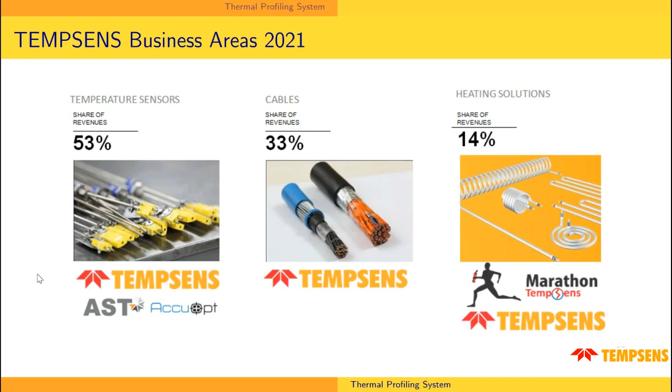In 2021, Tempsens' business areas are temperature sensors, which share 53% of revenue, cables, which share 33% of revenue, and heating solutions, which have 14% share of revenue. We are spread globally, with over 600 employees, present in 3 locations globally. We have applied 9 patents until now, and we also have 40 years of experience in this domain.

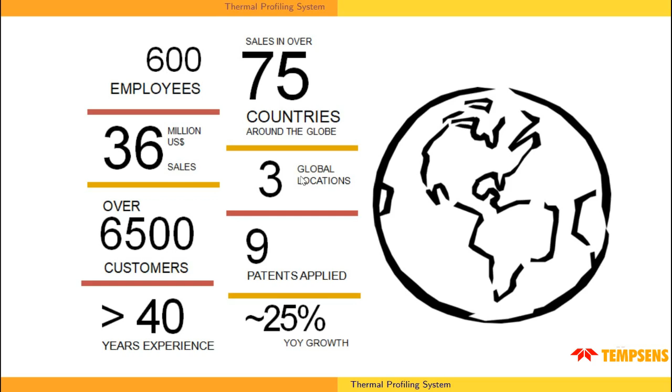Tempsens Instruments have majorly 3 domains: temperature sensors, heating elements, and cables. In temperature sensors, we provide a wide range from thermocouples to accurate RTDs, gauges, pyrometers, thermal imagers, calibration bath, furnace camera, fiber optic sensors and wireless sensors. So whether you want to measure temperature as contact type or non-contact type, we provide the solution in the form of thermocouples or non-contact sensors.

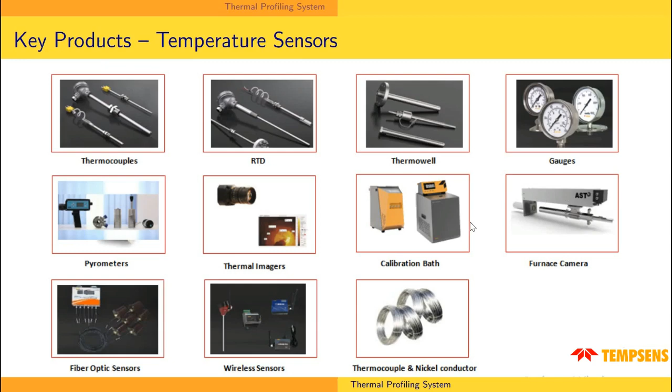Our key products in cables are thermocouple and RTD cables, high temperature cables, special cables, instrumentation signal cables, and LV control and power cable up to 1.1 kV.

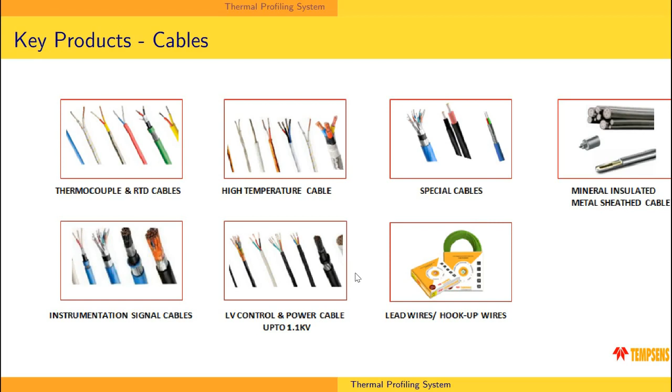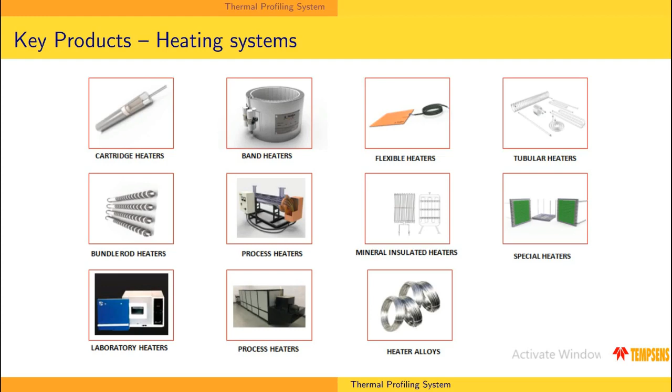We also provide heating systems and heating solutions to the industry. Cartridge heaters, band heaters, flexible heaters, bundle rod heaters, and process heaters are the major heaters we provide in our heating systems. We also provide temperature calibration services.

We are in Udaipur, Baroda, Bangalore, and Jakarta. Our comparison calibration covers -196 to 1600 degrees Celsius for contact sensors, and -30 to 3000 degrees Celsius for non-contact sensors, with small measurement uncertainty. We also provide furnace calibration services to industries, like temperature uniformity survey and SAT.

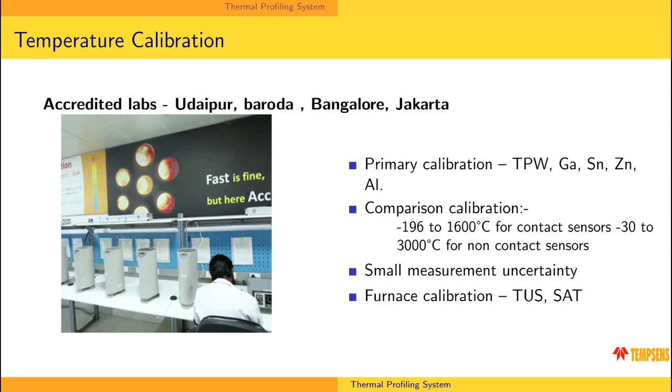Now let us talk about our main topic of discussion, the thermal profiling system. So before going into the thermal profiling system, what is its need? In each and every industry, temperature plays an important role. If we don't monitor our temperature accurately, then we cannot get a good quality product and cannot increase our productivity and optimization of the product.

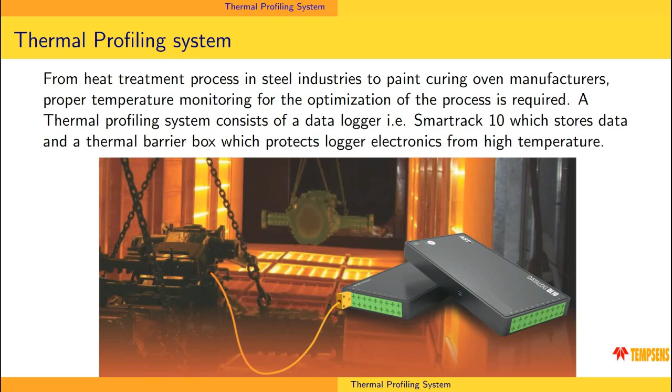From heat treatment processes in steel industries to paint curing oven manufacturers, proper temperature monitoring plays an important role in the production. A thermal profiling system consists of a data logger, Smartrack 10, and a thermal barrier box, which protects the data logger electronics from high temperature.

So now let us talk about the first part of the thermal profiling system, the Smartrack 10 data logger. It is used for monitoring and analyzing the temperature profiles of products within your heat treatment process. Accurate data acquisition and powerful analysis technique are combined with flexibility and ease of use. It comes with 10 channels of thermocouples of various types like J, K, E or T.

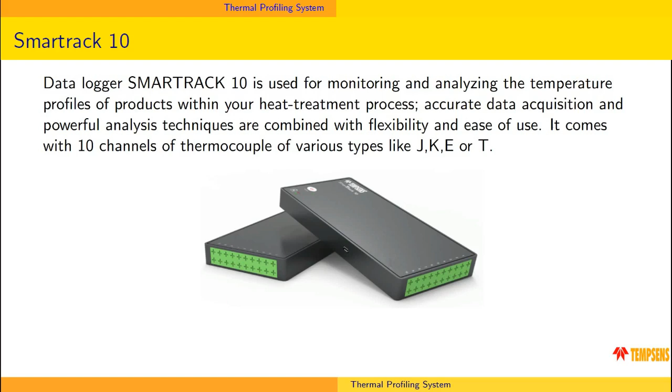Now let us talk about the specifications of our Smartrack 10 data logger. Total number of channels is 10. 50,000 readings per channel can be stored. Scanning rate per channel varies from 100 milliseconds to 1 hour.

Provision of replaceable and non-replaceable batteries are there. Replaceable battery can go up to 70 degrees Celsius, and non-replaceable battery can go up to 100 degrees Celsius. We have universal thermocouple input. LED indication for low battery, data logging and memory status is also there for hassle-free data logging. Wired telemetry via USB is available for data analysis.

Every data logger has some data logging services, but with this Smartrack data logger, you don't just log your data, you convert it into meaningful information. We also provide an RF wireless telemetry option, which is in development state.

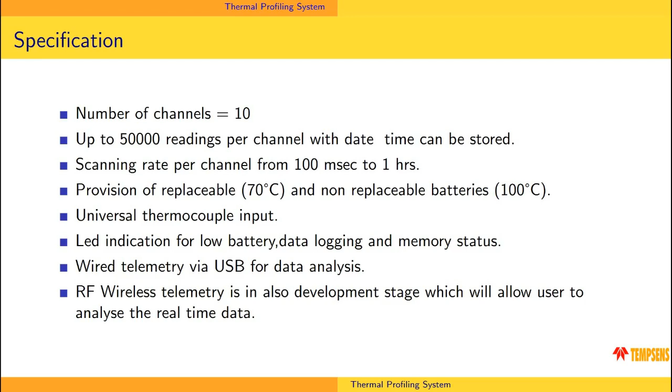Some of the features of our Smartrack 10 data logger are compact and portable design, accuracy within 0.5 degrees Celsius, 10 measurement channels, huge data storage capacity up to 50,000 data points, user interchangeable battery types, and a rugged aluminum casing which provides resistance to oxidation at high temperatures.

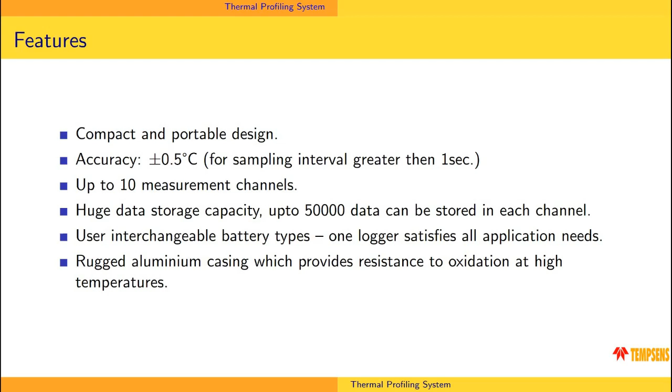Now let us come to the next part of our thermal profiling system, the thermal barrier box. After logging the data, it is very important to protect our data logger from high environment temperatures. If you put your data logger in 1000 degrees Celsius or 800 degrees Celsius, it will burn out. So we have developed a thermal barrier box which will maintain the temperature of the data logger at about 100 degrees Celsius only, even though our barrier box will be subjected to 1000 or 1200 degrees Celsius temperature.

That's why it is a major part of the thermal profiling system, because it protects your data logger from high temperatures. Basically in this thermal barrier box, we are using some kind of insulation, microporous insulation, and a phase change material which slows down the heat transfer from the outside high temperature environment.

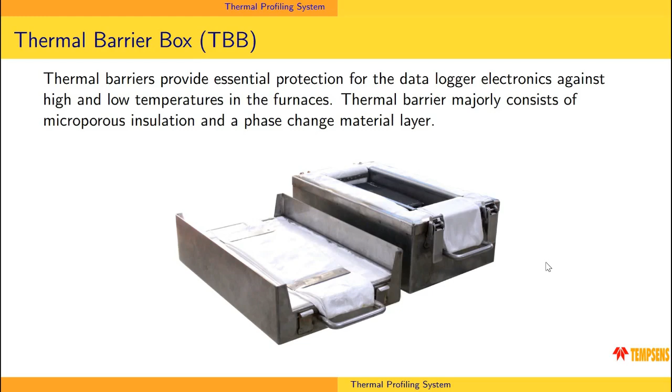We are providing three types of thermal barrier box models: TBB 180, TBB 250 and TBB 320. TBB 180 can go up to 500 degrees Celsius, while TBB 320 can go up to 950 degrees Celsius. So from low temperature applications to high temperature applications, we can provide a thermal profiling system for all of your applications.

Some of the features of our thermal profiling system are: we are using evaporative thermal barrier for high temperature and long duration. Maximum temperature can be reached up to 950 degrees Celsius. We are also providing replaceable wear strips to minimize maintenance cost. Dual thermocouple exits are there, along with provision of wear strips to reduce maintenance cost.

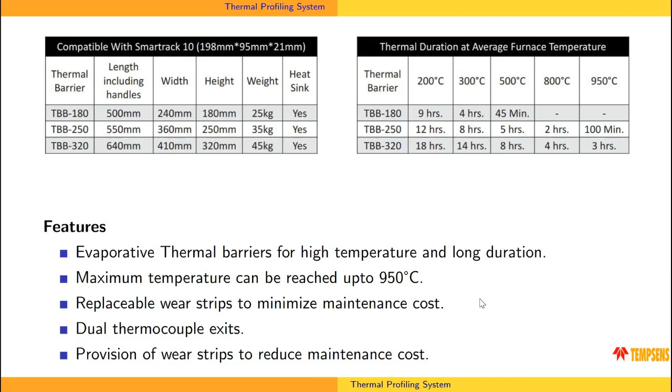There is only one movable part in this system, that is the thermocouples. It might be possible that the fiber cloth near the thermocouple exits will wear out, but that does not mean you have to change the box again.

You just need to change these wear strips and you can use the barrier box again for the next application. We are also providing infralog software for this system. After logging the data from the data logger and protecting it from the thermal barrier box, now it's time to convert that important information into meaningful data. So here comes the role of our infralog software.

This is the first configuration window of our software. Here you can see there are different trigger modes, like start and stop trigger mode, and date and time trigger mode. You can start and stop manually, and you can also give a date and time from which you want to start the data logging.

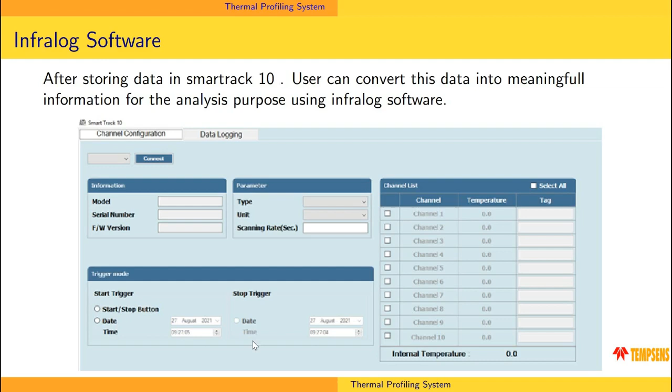You can also convert your data into a graphical representation, or get a numerical presentation of it. Some features of our infralog software are numerical and graphical data representation.

User defined scanning rate from as low as 100 milliseconds to 1 hour. Multiple modes of triggering: start and stop trigger, user defined start and stop trigger mode, rise temperature and fall temperature. Offset temperature alarm function is also there, and you can compare data of multiple runs, and export your data into CSV format, and many more.

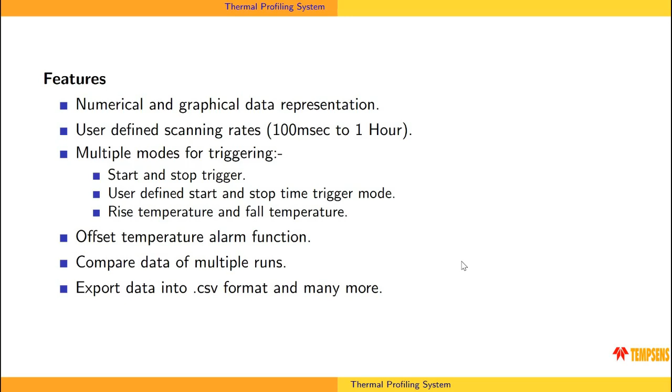We are also providing thermocouples for this thermal profiling system. Mineral insulated thermocouples, commonly referred to as magnesium oxide thermocouples, are used in many process and laboratory applications. They are rugged in nature, bendable, and their fairly high temperature ratings make MI thermocouples a popular choice for multiple temperature measuring applications.

Element sizes from 0.25 to 8 mm are available. SS321, SS316, SS310, HRS446, Inconel 600, Nimonic, Pyrosil, and platinum material thermocouples are also available. Swaged tip thermocouples are there, with high wall thickness which ensures durability, and tube temperature skin type thermocouples are also there.

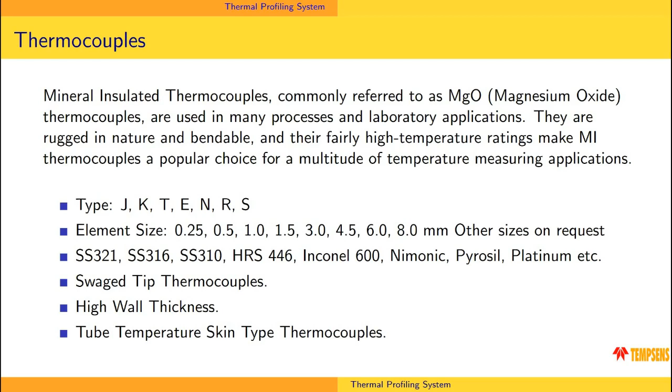Now come to the applications of this thermal profiling system. There are huge applications in industries, but one of them is the paint curing oven. Most problems in paint curing oven industries arise due to improper heating for a specific interval. This can be eliminated by proper temperature monitoring of the product. If you don't cure your paint properly, the quality of the product and paint is degraded, which affects overall production and creates more waste products.

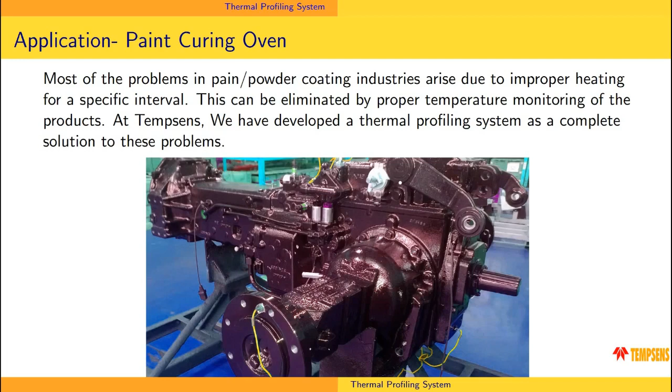So at Tempsens we had developed a thermal profiling system as discussed above as a solution for these types of problems. Generally you will need only the TBB 180 model for this application, because the duration of curing does not go above 2 to 3 hours. Hence you will be requiring a smaller box for this application.

Next application is kiln temperature monitoring. Firing temperature of clay plays an important role in the outcome of the product. If you don't cure your sanitary wares or tiles properly, there will be various issues in the product like coring and denting and many more. These temperatures are about 1000 to 1500 degrees Celsius, and for long durations, up to 24 or 48 hours also.

So what we are doing is giving you our thermal profiling system, which will be under the kiln car, where the maximum temperature is about 300 to 400 degrees Celsius. In this application we can give you an evaporative thermal barrier, which also gives long duration at high temperature. Hence you can govern your product quality throughout the process and ensure good quality products with less wastage.

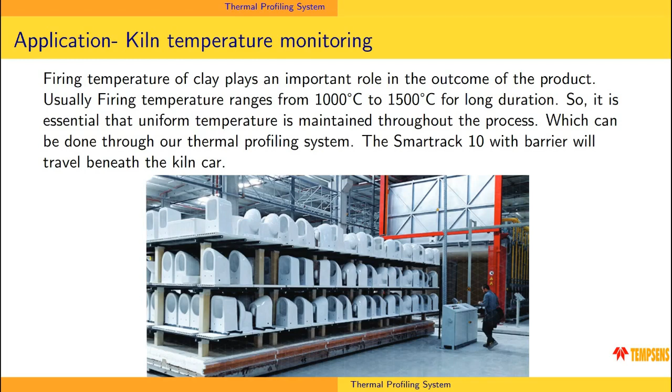Our third but not least application is temperature uniformity survey. From normalizing to different types of annealing, all heat treatment processes are high temperature processes, and the final microstructure from fine pearlite to martensite depends on these processes. If you have rapid cooling, you get martensite, but if you have a slow rate of cooling, you get a pearlite or bainite structure.

So it gives you the strength of your product. Hence it is very important to know the temperature of your product, because it determines the strength of the product depending upon its microstructure.

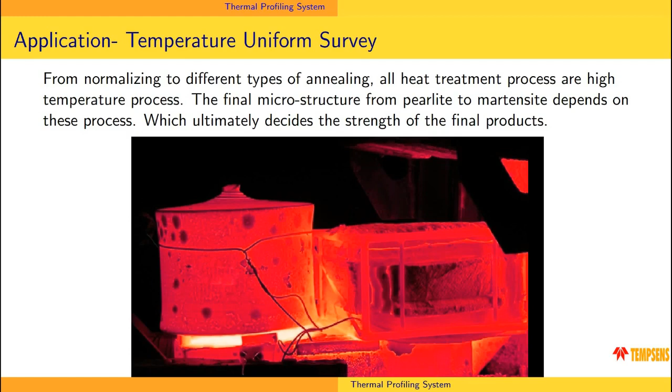Some other applications of this thermal profiling system are forming and toughening of glass windshields of automobiles, aluminum brazing processes, coil and leaf spring tempering, subcritical annealing of pipes and tubes, and hot and cold spots in furnaces can be quickly identified before occurring, and many more. Customized size barriers depending upon the user application can also be designed and manufactured.

So at the end, I would like to say that if you want to have temperature profiling of your system, then we can give you the solution for your hassle-free production and quality management.

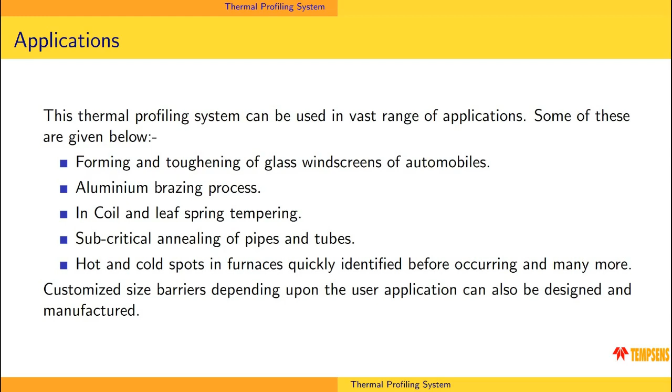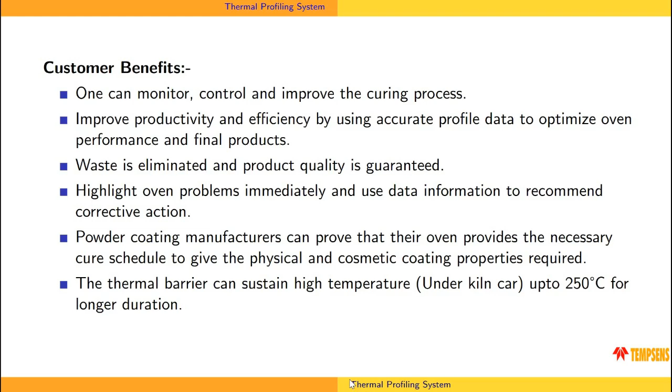Some customer benefits of our thermal profiling systems are: one can monitor, control and improve the curing process, and improve productivity and efficiency by using accurate profile data to optimize oven performance and final products. Waste is eliminated. Highlight oven problems immediately and use data information to recommend corrective actions. Powder coating manufacturers can prove that their oven provides the necessary cure schedule to give the physical and cosmetic coating properties required. The thermal barrier can sustain high temperatures up to 250 to 300 degrees Celsius for long duration.